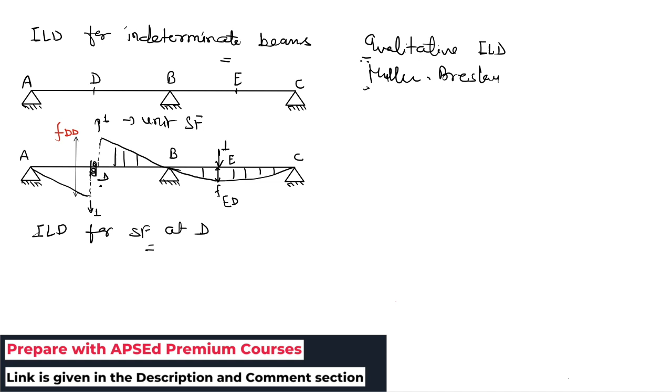So first of all, for using this Muller-Breslau principle, we remove the capacity of this structure to resist shear at D. So we have provided a vertical roller at D, and then we have applied a unit shear force, and under this unit shear force, the deflection of this beam will give the qualitative ILD for the shear force at D. So here we are obtaining this qualitative ILD.

Now if we want to obtain the different ordinates also, that is, this is the ILD, but what is the ordinate here or here at different points, what will be the value of the shear force if we want to obtain the quantitative ILD? So for that, how do we do it? Let's understand with this example where we are interested in ILD for shear force at D. First of all, we have applied this unit shear force and this is the deflected shape.

Now let's say we select a random point here as E. This E can be anywhere on the span. So we have selected a random point E and applied a unit load at E. Now due to unit load at E, we are saying that the shear force in the actual beam, the shear force at D, is V.

Now the deflection at D due to unit load at E we are indicating with FDE, the deflection at D due to unit load at E. So that is the part where we have applied the unit load at E.

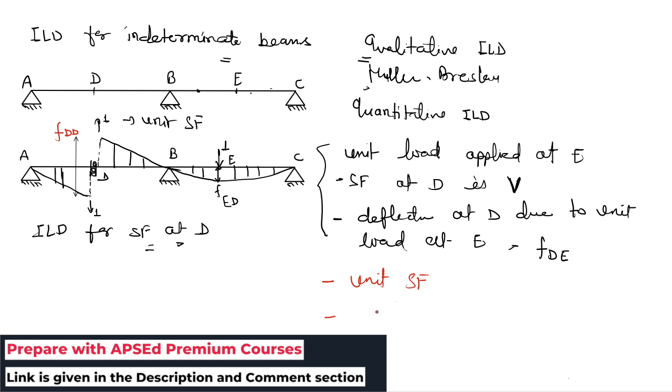Now let's say we are coming back to this point D, and at this point we have applied a unit shear force. Now under the action of this unit shear force at D, the deflection at D due to unit shear force at D we are denoting as FDD, this part here.

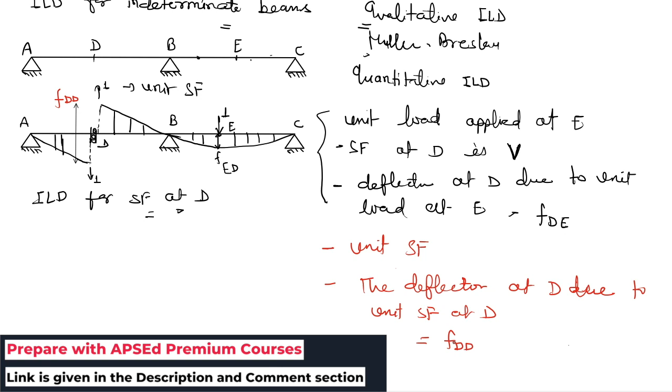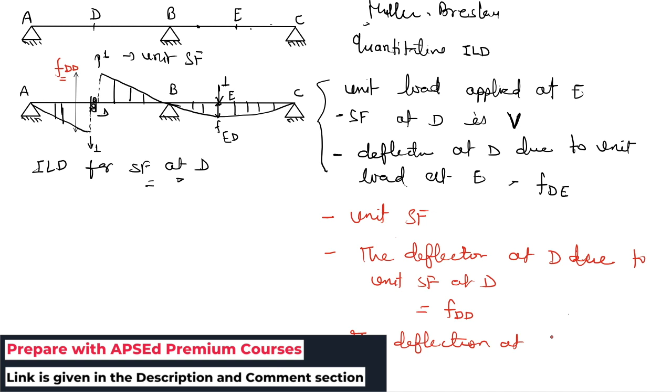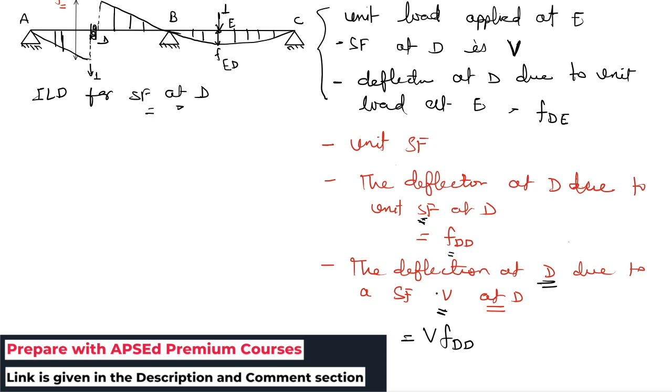Then what will be the deflection at D due to a shear force V at D? If we know the deflection for the unit shear force, then we can find out the deflection due to V shear force. That will be simply V times FDD. So V times FDD shows the deflection at D due to shear force V.

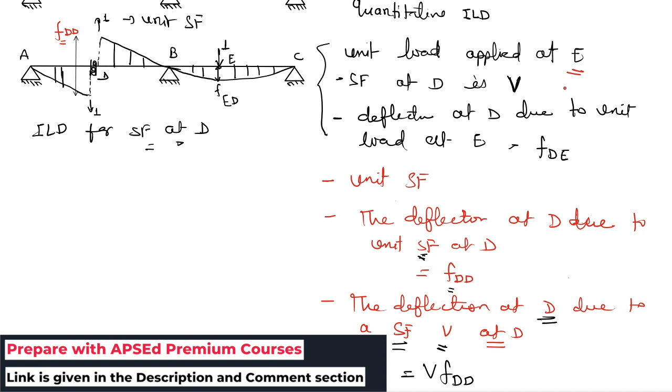Now we know that the shear force V was the shear force coming due to the unit load at E. So from this condition, we can say the quantity FDE will be equal to V times FDD, because both indicate the same terms. This is the deflection under shear force V, and this is also the deflection caused due to shear force V, just that the load was applied at E.

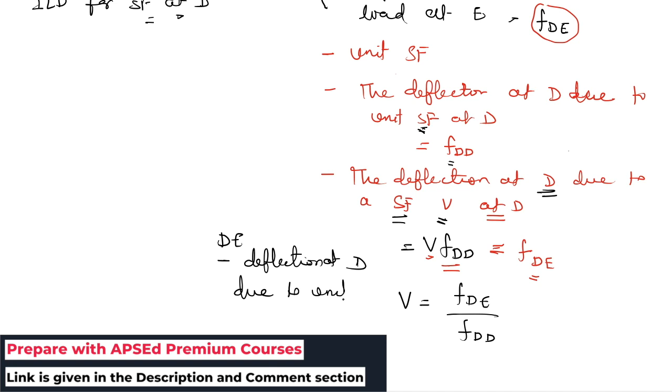So from here we equate these two and obtain the ordinate of ILD for shear force as FDE by FDD. FDE indicates the deflection at D due to unit load at E. And we know Maxwell's reciprocal theorem, so instead of writing FDE, we can write FDE equal to FED. So we obtain the ordinate of ILD for shear force as FED upon FDD.

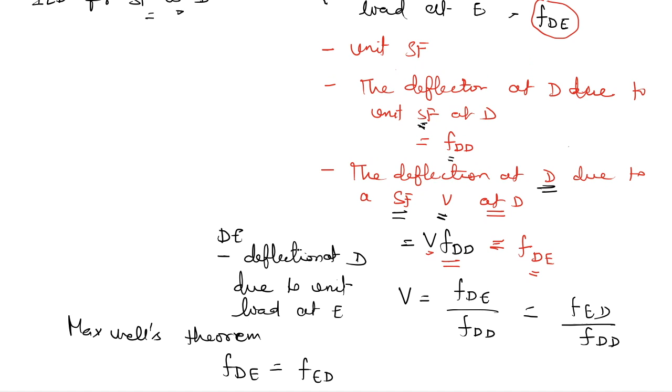Why have we used Maxwell's theorem? In the first case we wrote FDE, the deflection at D due to unit load at E. If we use FDE upon FDD for obtaining the ILD, we need to apply the unit load at various points on the span and then find out the value of V. But when we write FED upon FDD, it is the deflection at E, the variable point, due to unit load at D.

So we just have to apply the load at a single place, point D, and E can be anywhere because it is variable in this expression, and using that we can find the ordinates of this ILD at different points. The deflection at different points can be obtained using the conjugate beam method. It is covered under our paid course for indeterminate beams also.

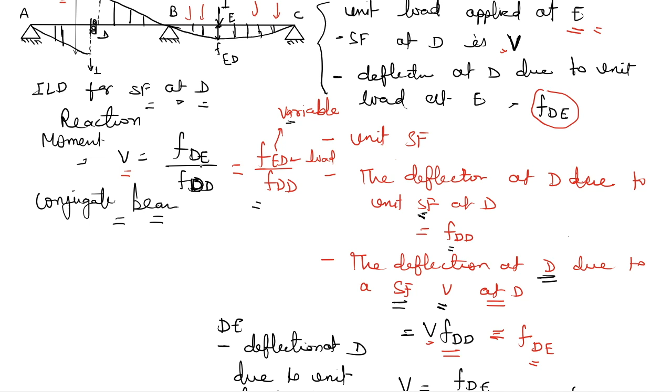Using that we can find out the quantitative ILD. Similarly, we can use the same method for obtaining the ILD for reaction as well as moment. So this was the first doubt, how we write the final expression V equal to FED upon FDD. So that I have covered.

The next doubt is a simple question. Shear stress in XY plane is given as 1000 MPa. A block is tested in shear, and this is the shear stress. It is asking for the shear modulus, and the strain matrix is given. Because the matrix is given, we need to understand what these elements are in a generalized matrix.

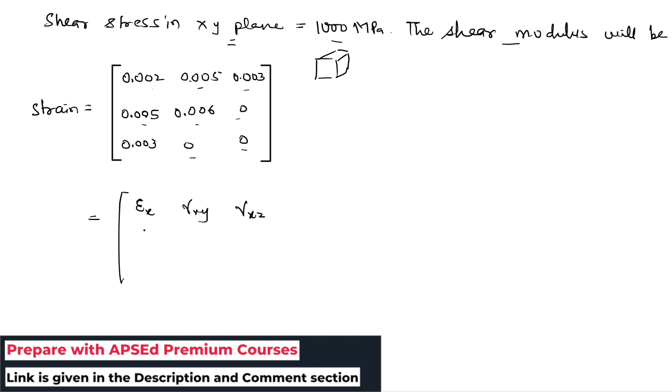In a generalized matrix, we have epsilon x, gamma xy; this is the linear strain, this is the shear strain, then gamma xz, then gamma xy, epsilon y and gamma yz, and then gamma zx and gamma yz and epsilon z. So the diagonal elements show the normal strain and the rest show the shear strain.

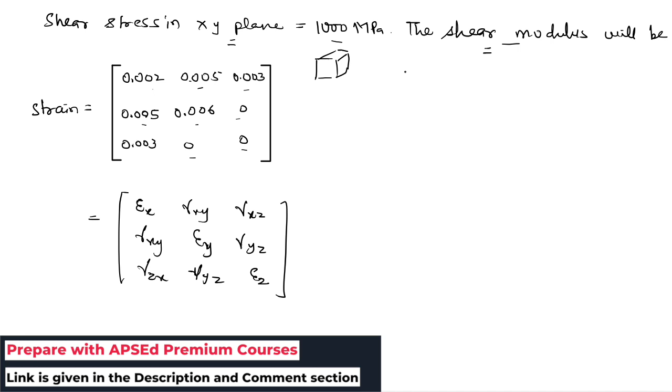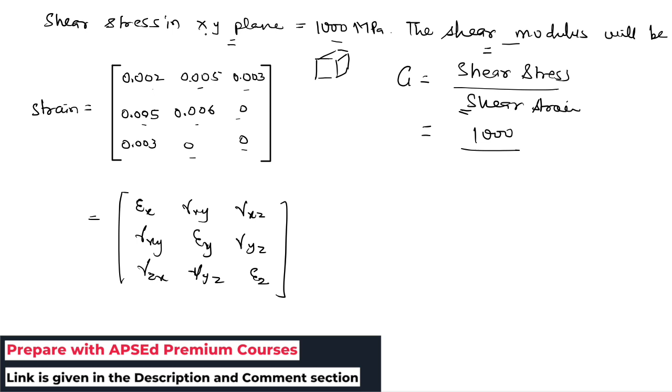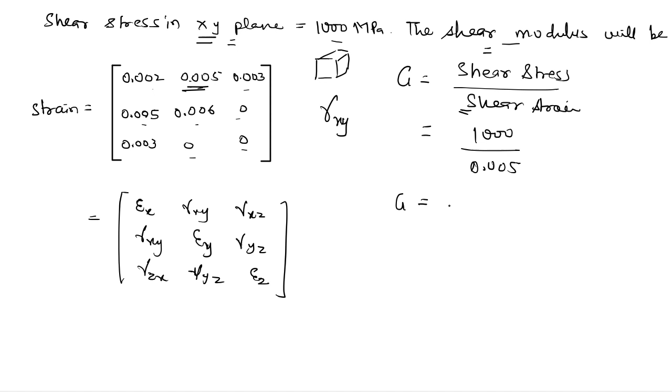Now we want the shear modulus or modulus of rigidity. It is the ratio of shear stress to shear strain. Shear stress is given in the xy plane, so we want the shear strain in the xy plane, which is 0.005. Taking 0.005, we obtain the shear modulus as 2 into 10 to the power 5 MPa. That is the required answer.